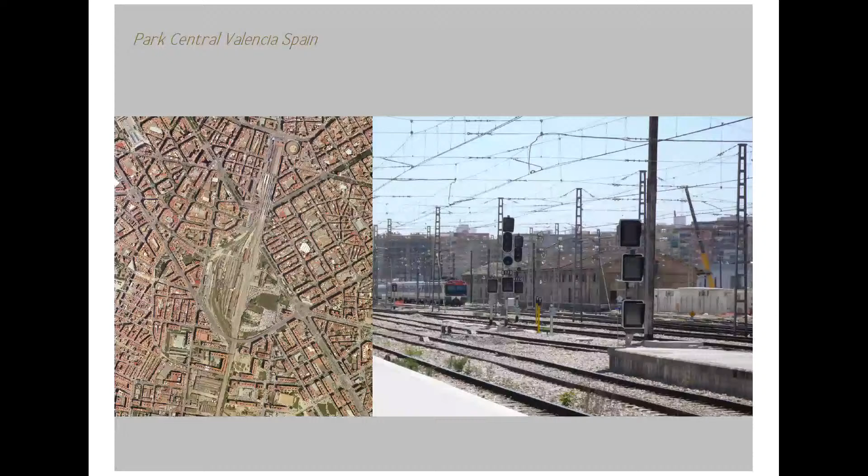Then you have this abundance of water that's coming down the River Turia, and then the Albufera, this huge aquifer of water. I think it's Adriaan Geuze that first said, Valencia, you've got water, you've got sun, you've got soil, what else you want? So it's really a very magical place to live and work.

The history of the channelization of water is a history I grew up with, and it's also very specific to you. There's also the fact that the bowls are... let me go back one. The Albufera absorbs that water and filters it through the sands, which is amazing. That feeds the aquifers. So you have this perpetual system.

Then, after seeing the magical night, the next day I went to the museum, and this is one of the bowls that I saw. It was clear that this whole place is about food, and it's about serving food and being about food.

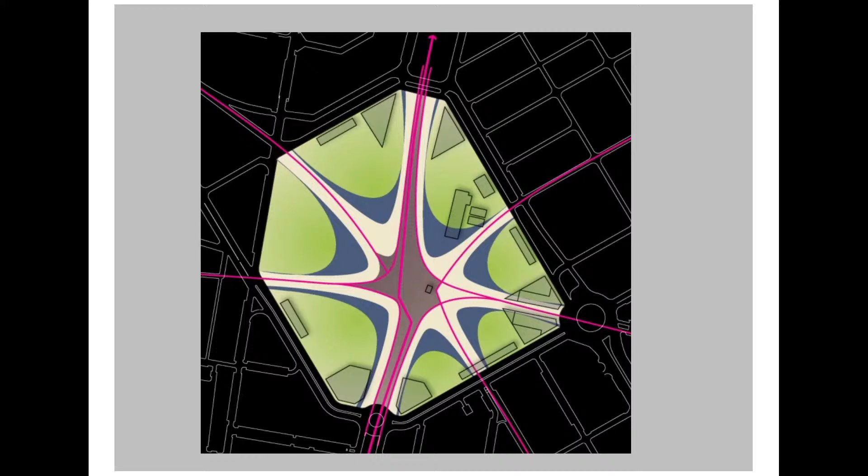So this is the first drawing, we worked a lot on the diagrams to explain the concept. This is facing north-south and shows how everything comes into the center. But as you move in, you see something else. You're constantly discovering, if I come here, all of a sudden I'll see this, or I'll see that. You're discovering things, then you radiate back out and radiate back in, and that's how the composition of the whole piece works.

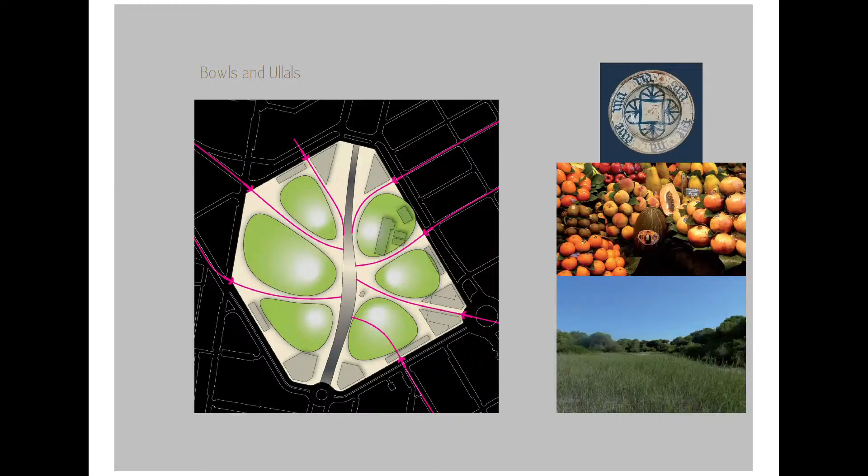Then the bowls come, programmatically. Here we see the ullals, the big sand dunes where all that water gets filtered, gets cleaned, and returned to the aquifer. So there's that thing about discovery. From the north, you can see this is a stormwater basin recycling all the water, sending it back into the system, but also having native plants, native vegetation. It is not treated water. Then as you come down, you discover this, or discover that, or discover this.

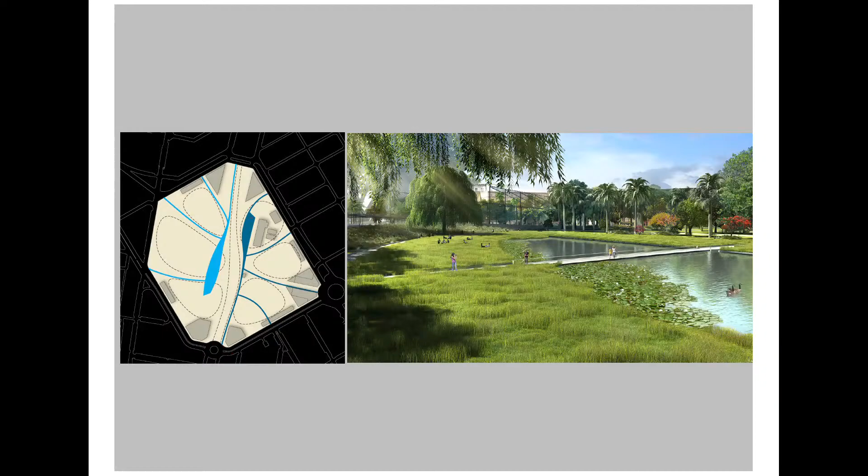Going up, this is all what I call cultural water, you play in it, you walk in it. That's what you see built today, the cultural water. On the side of the natural water, it's all native vegetation, existing around it, recreating habitat and biodiversity. One part of the park is much more natural and one's much more cultural. This cultural area here is existing, and this whole area you see today is much more cultural. This one is much more natural.

And so I really want to build it. Part of that is also having flexible spaces for events, having this big, beautiful historical building, having places to go outside, have events, have the fountains, turn them off, have fairs, making it economically viable. So a lot of those buildings are there to have investments done in them, to have fairs, to have activity. It's really expensive maintaining a park, so you have to generate ways of maintaining it.

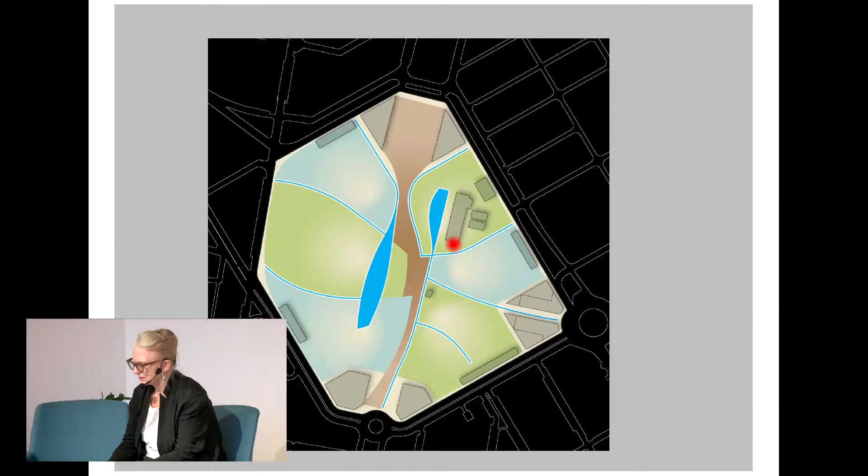This is basically the final plan, but what this talks about is that every time you walk into this park, you walk in with water. Every entrance today is with water, and every entrance in the future will be with water, because that is a symbol of Valencia itself. We still have the second half to build, help me build it, keep the pressure up.

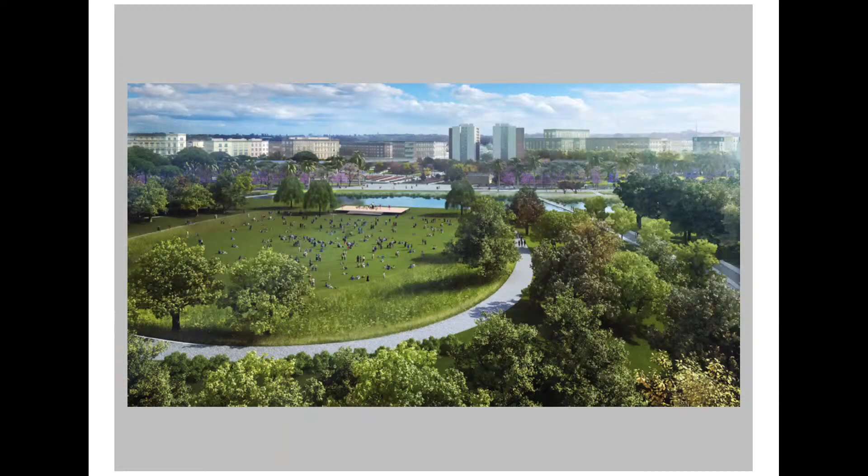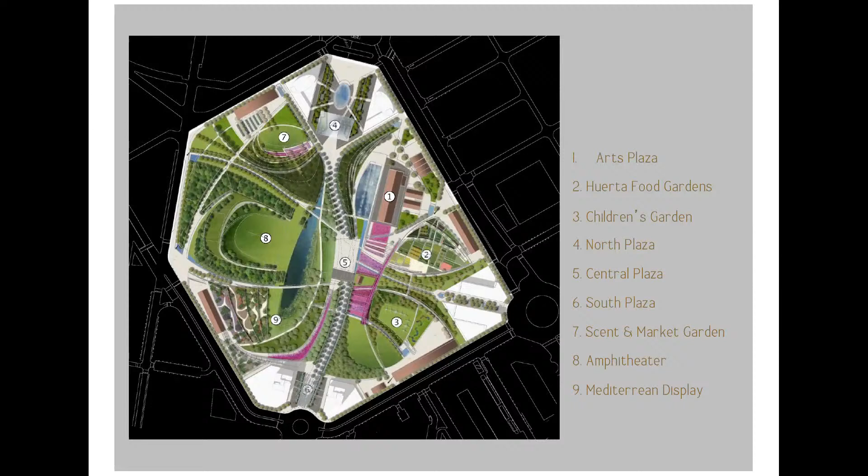And then this is the program that most of you know. This is historical, with the restoration of historical buildings, the Huerta, romantic valley between these two huge walls, the children's playground, everything in the Huerta, the floral that is grown here, and then the other sites we just spoke about earlier, big plaza up by the train station, another plaza here. There should be 1, 2, 3, 4, 5, 6 towers built. Those towers are part of development. They help pay for things. Hopefully they will come along and there'll be good architects that do them.

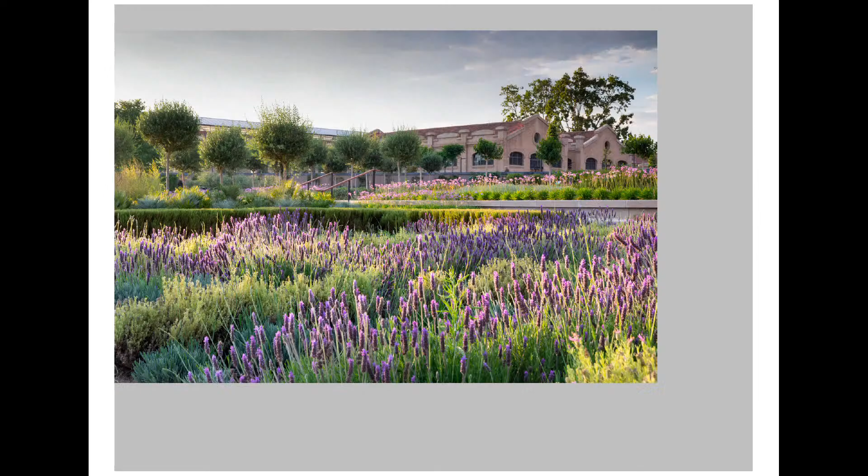So it's a garden right now that I love. It needs some extra little maintenance, but it looks pretty good for having gotten through COVID all by itself somehow, and with a lot of good help. And with time, I'm sure it will last over the time.

So last thing, water is magic. This water has a lot of different moods. You see it with jets a lot, but it's actually quite good when they're not jets and it's just silently moving over this space like this, and creating different patterns. So we need to work with how we program the jets and how we work with them. They can be raucous like Las Vegas, or they can be very quiet, and they can always be fun.

And always a good conversation.

Now, what's the other part we haven't built? This is one of the things I really hope we'll be able to build in Valencia. This was conceived over 10 years ago.

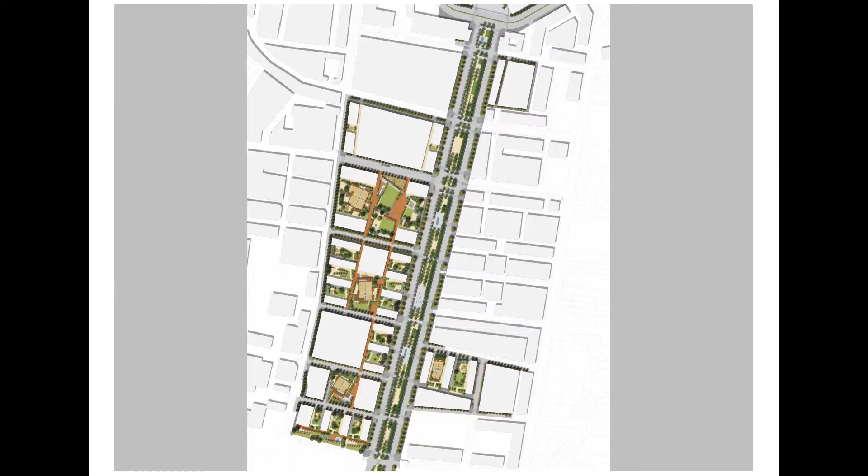And be careful, we can't just make everything green. We've got to get ambulances in, fire trucks in, garbage trucks in. I'm not sure we need your personal cars, but we have to have everything else that makes the city function. Having rapid transit, having all that, is really important to making a city work, and we simply can't live without it. So unless you're going to invent a massive amount of drones that put out every fire - maybe that'll happen in 25 years - but right now we have to deal with the services we have and the people who do them. I know that's a little boring, but it's true.

This was done 10 years ago. One of the things I love about Valencia is these huge boulevards of center spaces. Would like to use them more culturally, make them more attractive, find ways that they get inhabited and used more. Again, this section is 10 years old. Would like to take out more of this traffic, build in more green, make them more sustainable. Here's some of those spaces that can change program-wise, but again, you stay within here, and you do not have contact with vehicles on the outside, and thus danger.

And same thing here, they're all based on the same system. Hopefully I'll be back one day and finish the rest of the project to create the neighborhood to the south. And somebody said, well, who's doing the buildings? These are a lot of buildings here that have to be built.

And they said, oh, the same architect? And I said, absolutely not. You want a different architect for every building. You want diversity, something that is different talents coming together to make your city. Your city does not have the same architect doing the same building every place, anywhere. So that is something you as architects need to fight for - that you keep that diversity and it doesn't become this massive super block of the same architecture that looks like the same thing, where everybody looks at their building and doesn't know where in the hell they live or where their identity is. So I'm counting on you to fight that fight.

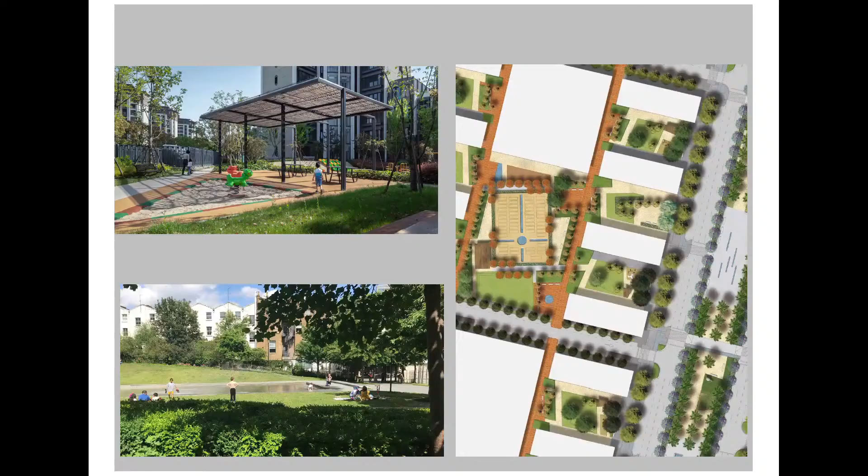Also, the center alley, water again—water everywhere is part of your culture—and making sure we get really great planting in there, biodiversity, also just flowers, things that are just part of our lives that make us happy.

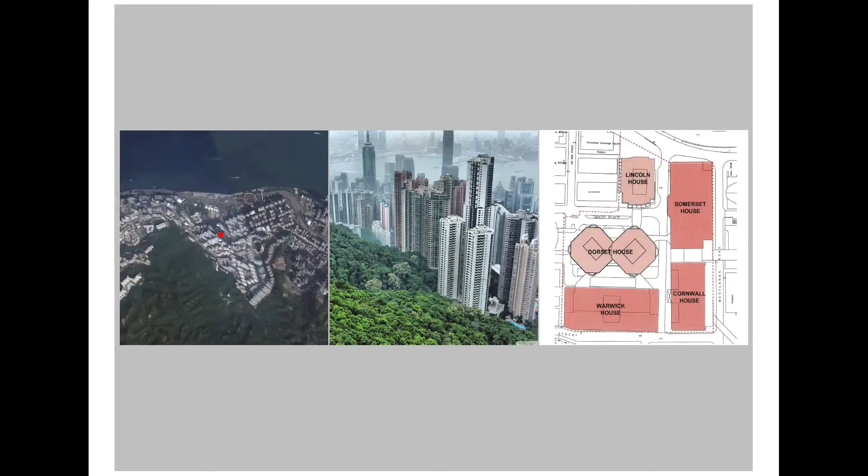So this is Hong Kong, and it's the first time I'd worked in Hong Kong, and wow, what a trip. I'm working on the Rock with a company called Swire, and they own a little bit of land—like all of it. This is their territory, and these are just a few of their buildings. Everything's high rise, but the fabulous thing is the Rock is all natural vegetation, and it's all protected. So you can stay in a hotel, walk out, and within 5 minutes you're hiking in a forest in Hong Kong. It's one of the healthiest cities I've ever lived in, and I've spent 10 years there now and absolutely adore it.

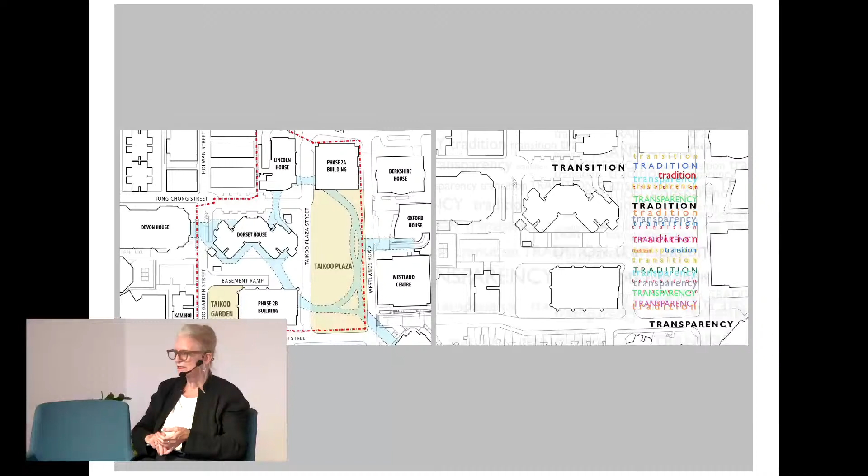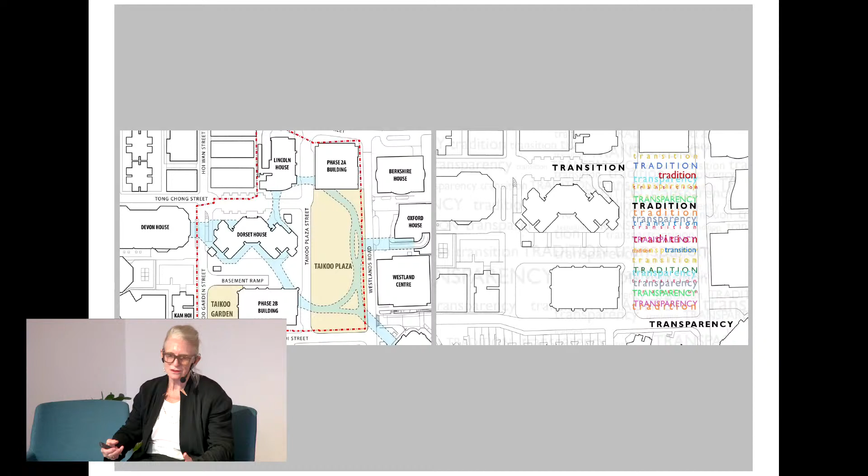At the time I started, remember all the different manifestations were happening there, where people were saying, well, the Chinese are coming, they're going to transition us, and other people are saying they're going to take away our tradition. But then, what is tradition and what is transition? A lot of people said there's no transparency. So this is about that period of saying you're going to transition, okay—there's no way around it. But can you keep some tradition, and can you also keep transparency as you did it?

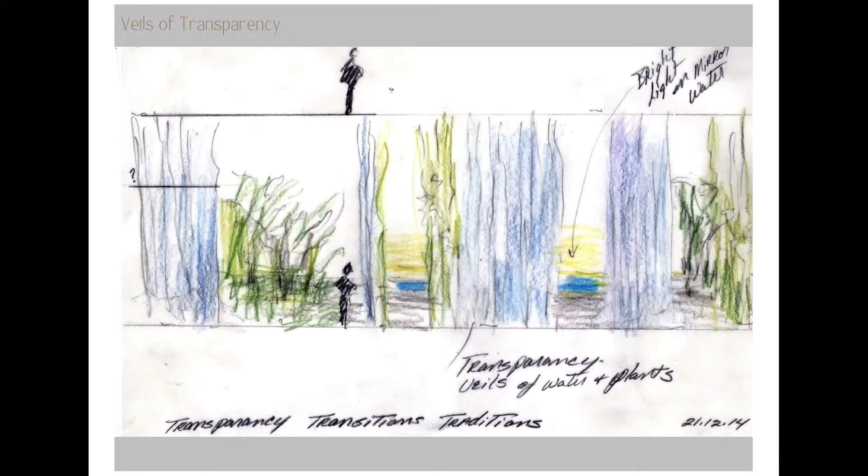So how does that part of the culture, how do you integrate it into your concept? I don't want to take up too much time, but basically—rain, and rain, and rain, and rain, and typhoons, and wind, and rain. So we wanted to do a piece where we look through a sheet of rain, basically, into a new future.

So that's your transparency, a veil of water, and through it there is a bright light that you see through, and that's your future. There's this walkway up above where you can see into the piece and still be separate from it, but also part of the piece.

And you'll see the site—it's the size of a football field. In Hong Kong, that's unheard of for a landscape. You know, build a football field of landscape. The way the site is made, one corner is 5 meters higher than the other 3 corners, so it has this tilted piece, which is this here. And then it has this walkway, done by Hugh Dutton, that goes all the way around it. So this becomes a podium of that transparency that you move through into this landscape.

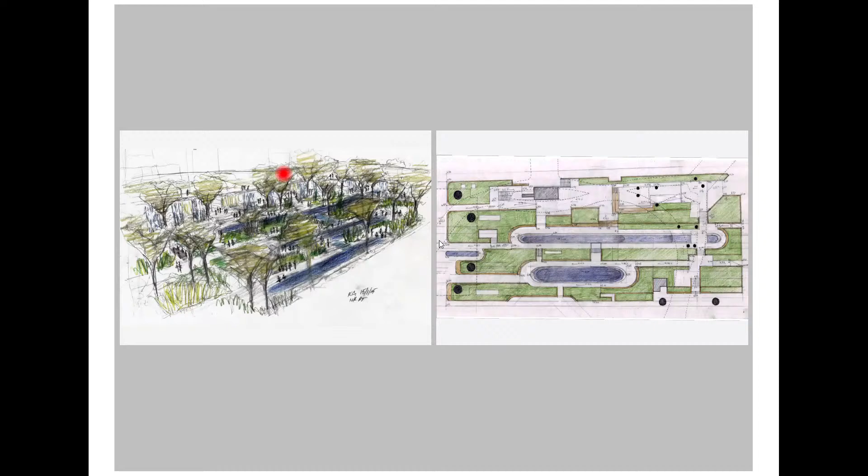This is one of my first sketches of it, having these lines of water you move through. If you look at this drawing, it's based on what my client did for a living, which is shipping sugar—that's what paid for all this. You can see where the boats were coming in, and this is my model of the piece of the landscape.

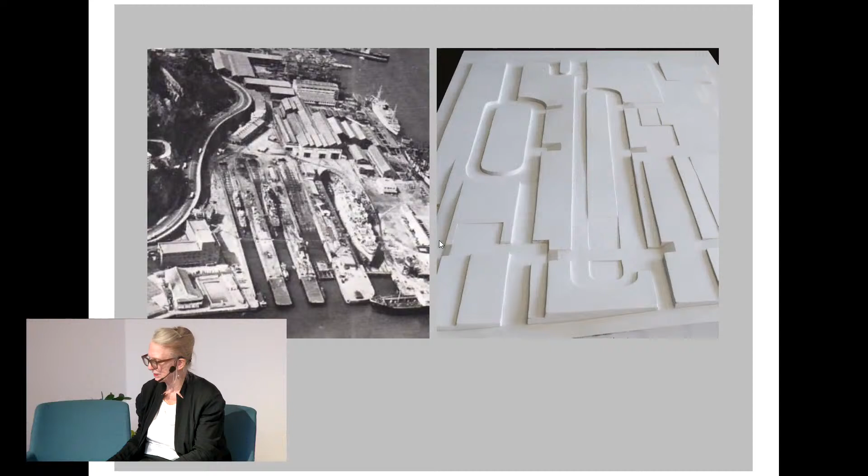Now these are water features. This one's 76 meters long—this is the oval water feature. There's another one down here. But they're all lines and veils, so every time you move through one, you're moving through a veil, through transparency. And the one place the sun hits every day, all season, is right here—so that's your bright light right in the middle.

So these are some of the sections. Everything's built on a 5-story garage underneath it. What they did is they took down 3 buildings and put up 2 sky rises on either end to pay for it, and liberated all the ground around it.

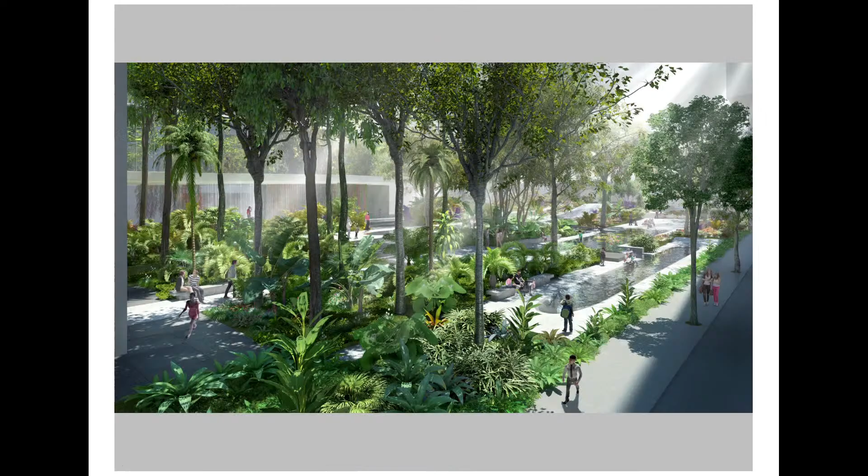So here's the model, just to show you the high point I was talking about—it's up at this corner, and you can see how it steps down. One high rise is here, the other high rise is here. We actually did the interiors of that high rise, because in my office my partner, Neil Porter, is an architect also. These are some of the drawings—we're subtropical in climate type. And then we started working on how the water works.

This is something a lot of you probably already know. We do a lot of stone carving and a lot of working with water. This is the long pool, and it has water moving down it. Then we started modeling it to see how you're going to actually do it.

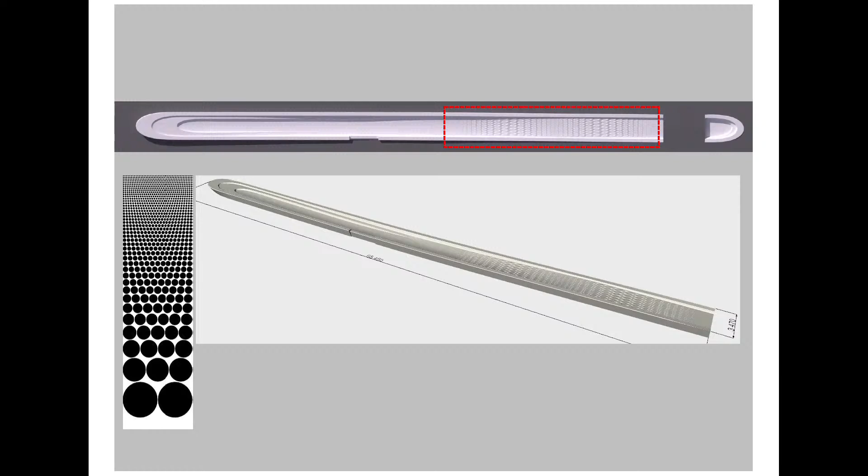I think it's good for an architecture school to see that we don't just pop up with these things. They take months and months to do in the computers, in models, testing them. I wanted to show the process quickly: you can see how we go from models here, then they're cut in polystyrofoam, and then tested for how water movement is done.

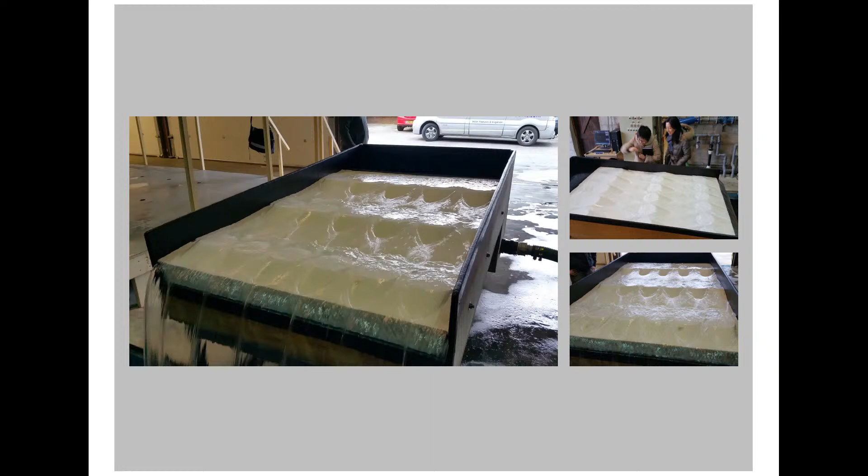It's one of the cheapest ways to test them, using polystyrofoam. We started experimenting with that about 7 years ago. It really helps, and the polystyrofoam works just like stone. The CNC machines can cut them in about 3 hours, not 5 days or something. Then you move to stone, and it's the magic of the stone—the water through it changes things.

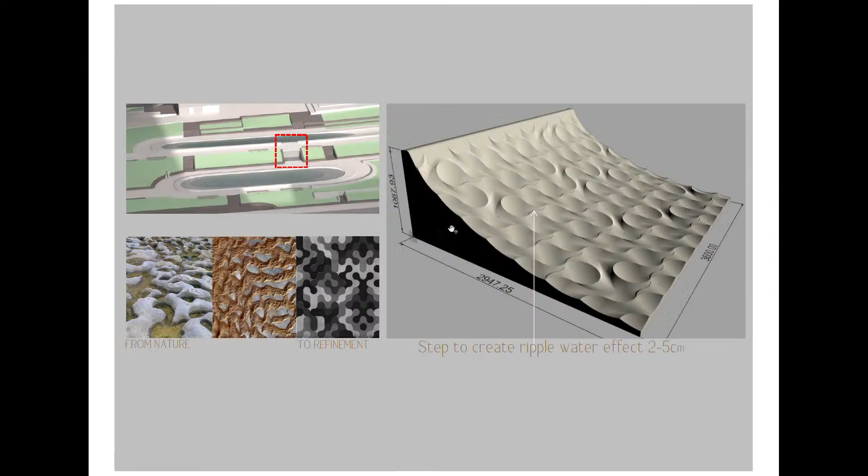This is another waterfall, another area between two basins. This basin flows into this one here, and this one flows into the recycle of the whole system.

These are some of the patterns, looking at how you catch water and move water, and again testing it—everything is tested. Do not try to carve a piece and not test it for water, because it probably might not work. I've seen too many not work.

Then trying to figure out what is the best stone, what is the best texture—people decide to walk on it, so they don't slip. There's a lot of different things you have to be careful of if you're doing water and stone. These are some of the CGIs. I have new images, but I'll actually be there to take final images in 3 weeks.

The other thing we did, they're feng shui forests—pieces of forest by villages that the villagers take care of to protect their village. We couldn't find the trees anymore, so we went to a local university with a seed program, where they do experimentation with horticulture and seeds. They actually gave us the seeds, and we started a nursery and grew our own trees.

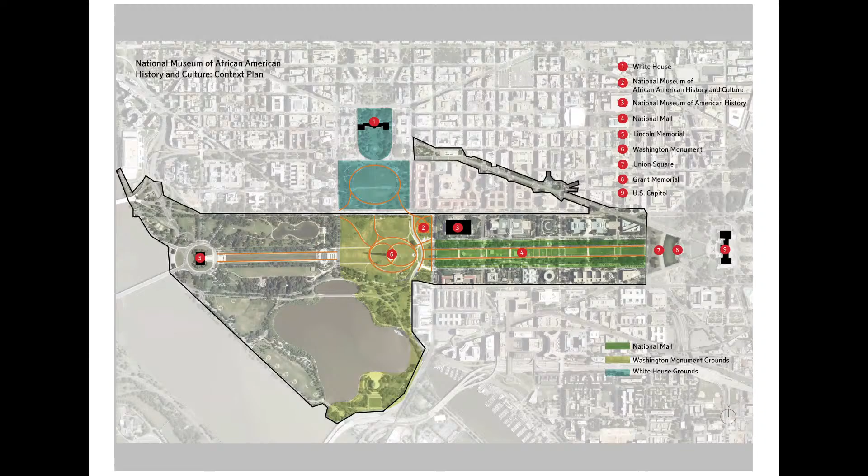We had to make sure we wouldn't flood the basements of this museum. And also you have eyes on you in Washington, D.C. because you have all this historical landscape. So we worked really hard to fit in with the Washington Monument, the Oval Gardens of the White House, and the mall. One of the things that happens here is at the Washington Monument, all the traffic dips down, so you never see a bus go in front of it. We worked with that land movement to understand how the mall continues, and how we integrate ourselves in. You've got a big grade change from here to Constitution.

Most of these museums have a whole floor inside of them, so you have one entry at Constitution and another at the mall. How do you do that with a contemporary building that wanted one floor as the entry from one end to the other? Working with the architects and the site, over time we found a very simple landscape that would support all the different parts of it.

And obviously we're in Washington, D.C. We have anti-terrorist walls everywhere. They have to go like 2 meters into the ground, with a certain thickness and so much steel in them. And then you want to make them disappear, right? Like they didn't exist. That's kind of an interesting challenge, but we did it.

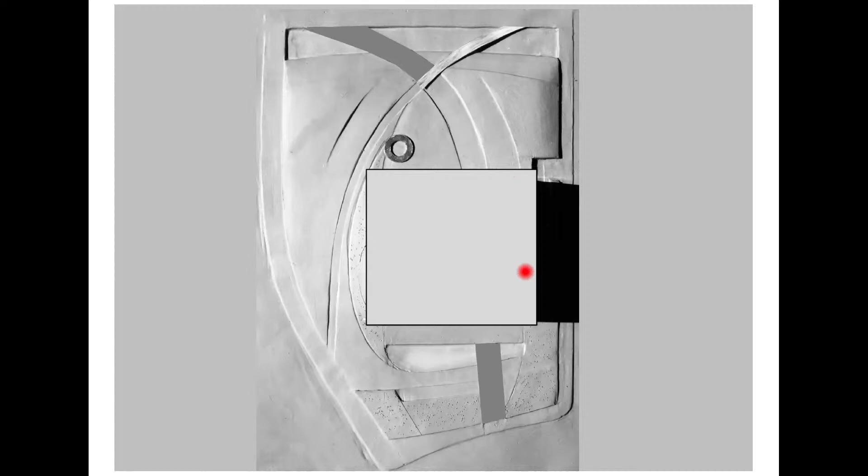We flood up to here. This is my truck access, underground deliveries here, and we're above the flood line. Siting a building is always an interesting endeavor. This shows how we worked with the people movement that flows through the site without going to the museum, but still being part of the Washington Monument and the mall, to make sure we're integrated into that entire site.

So this is my model next to a very simple plan showing the different elements I just told you about. This is the water feature on the north, and the sun—excuse me, it's on the south. You can see the sun in the winter is here to keep you warm, and in the summer here. David wanted this very large balcony piece, which actually protected our entry from the southern sun. It gets hot in DC—it gets really hot. And I had my water feature here that you cross over.

You can see this water feature there. Again, we're up here taking part of that grade going down to Constitution, pulling people in while still creating the security walls on the outside edge so you don't see them. It's a real balance of visualizing where people are and what they see, so they don't feel like they're in some sort of fortress.

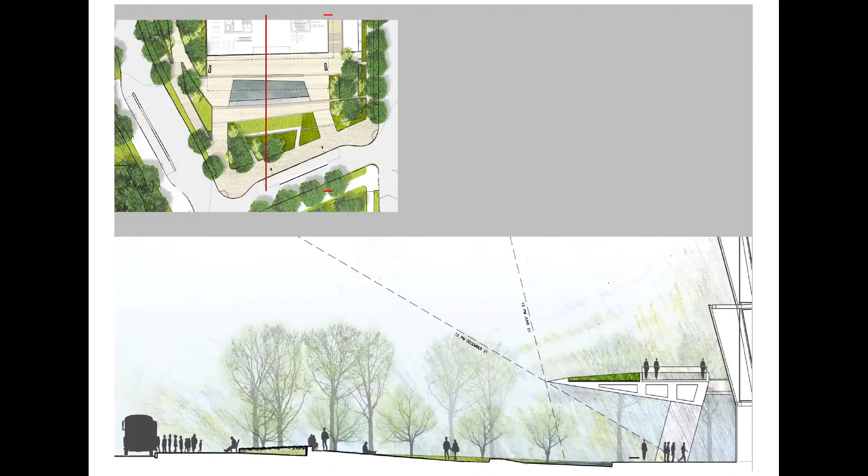This is my concept for the water, and it's about African Americans. There's so much turbulence in their lives—if you're an American, you know there's a problem. But on the other side, the African American community is one of the strongest communities I know, and they're fabulous. You look at Max Bond, you look at some of the really wonderful people. So I have a water feature full of turbulence and full of drop-dead calm. Just: I'm strong, I'm Black, okay? I'm not moving. Those two things are what is America.

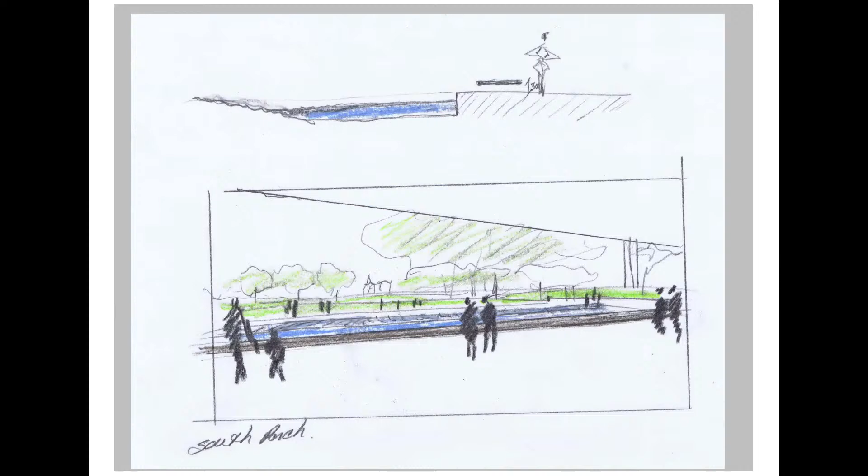Trying to represent that, I created this piece where the two waters never touch—one is turbulent, one is flat, and they never touch. There's a slice between the two of them, and there's a long bench in front where you can sit. In the turbulent area, I worked on this thing called murmurations—like flocks of birds, the way they move together. Have you ever watched how they are? Their wings are almost touching all the time.

And it's one of the most amazing things how they move. The African American community is like that. They are always in touch. They may move and do things, but the support system within it is really interesting. And so the songs and the music and this joyness of them is something that I wanted represented in the turbulence. So this is my murmurations, and each one of those are turbulence in the water.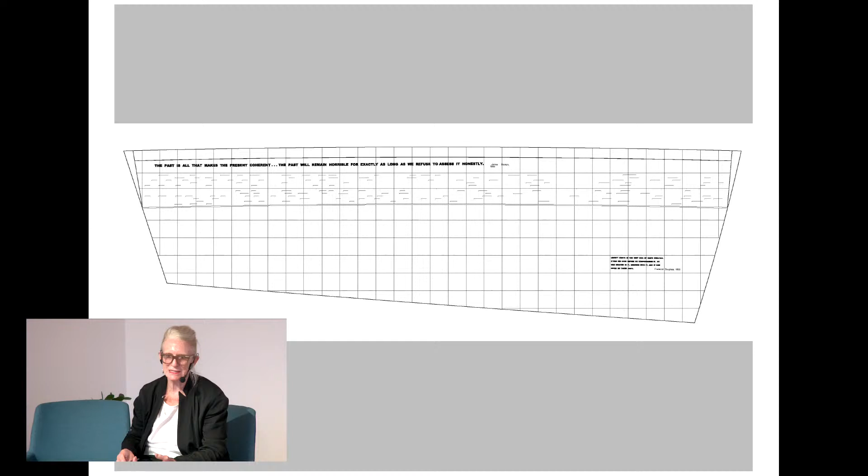And then there are some great African-American writers. So there's written statements in bronze under the turbulence because they wrote about the turbulence. And so this is the drawing. And then this is what it looks like, just that one slice between the two. It looks simple, but to get it that far, to have that much meaning, I think is really important for me.

And this is what it's like today. Everything's handicap accessible, of course. And it also reflects the Washington Monument in it. You are sitting there in front of the African American museum with the Washington Monument, kind of symbolic. Very, very strong place for people, and a place where people can sit and be at ease.

And that is one last thing that happened. I had what we call value engineering because David's facade went over price. And because his facade went over price and it was such a beautiful building, they said, okay Kathryn, cut out a water feature. So remember that water feature down there? They said, get rid of it. I said, okay, that water feature was my security bollard, because that meant that a terrorist truck would go into it, it was deeper down in it, and it would block them.

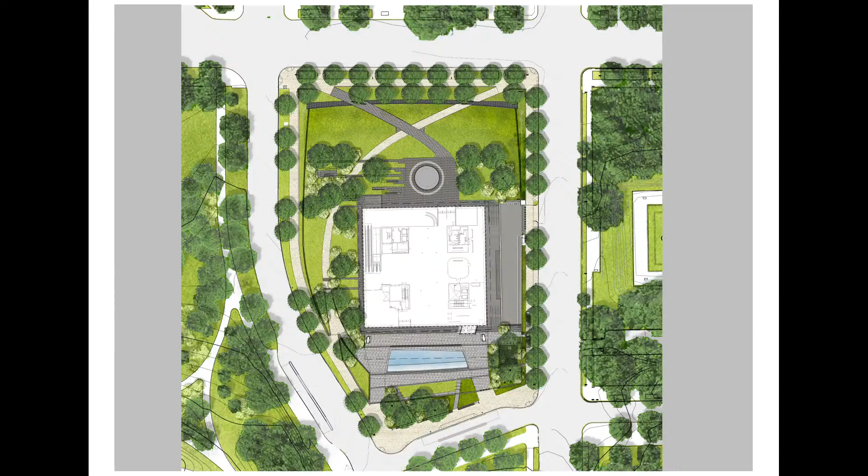I said, okay, well, you don't want it, I'll just put up a wall there and put your museum name on it. The Arts Council came back and said, no, concept not good enough, go back to the drawing board. And I called David and I said, I want to do this really big black wall. He said, you got all the power. The Arts Council refused it, they got to have something. So I proposed my black wall.

And the black wall is a huge muscular wall. And it doesn't pretend to be anything else but an immense black wall. And it is solid granite, 5 meters wide, 200 meters long. And it's crafted completely beautiful. It's like a beautiful shoulder. It's rounded, it's warm, it's absolutely fantastically beautiful.

What happened, I could have never guessed. These are where the handicap access is, so you can get through. It's become the party place of Washington, D.C., because your back's to the sun, you're sitting on warm granite, and all the food trucks are parked in front. And it's just, everybody uses it all the time. I would have never guessed it.

But if you think about it, it does make sense. Look at it, it's always like this. And in winter? Huh, in winter? Yeah, because it's warm, because you've got the sun, the black stone. It's black, you know, it's African American history building.

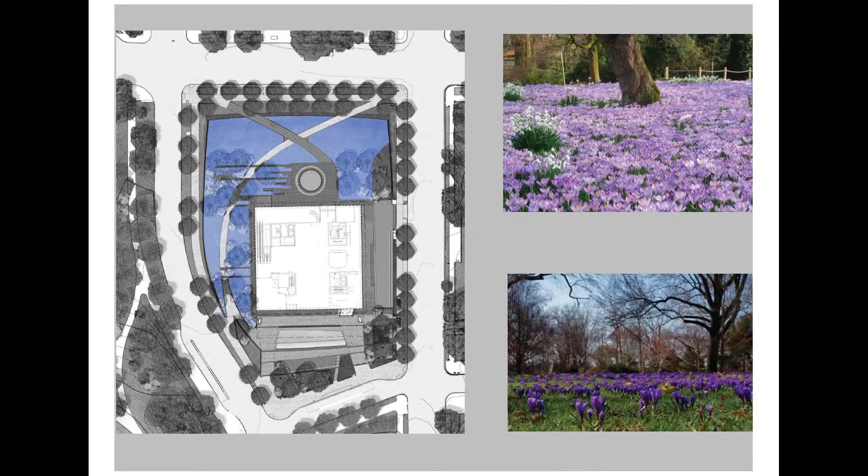It's black. And there's then the fact that we've discovered all sorts of things, like blue is the color of the dwellings that protected the thresholds. So we planted for African American month in February, 360,000 blue crocuses that flower only that month. So it's full of surprises, but God, it's a beautiful site.

And David did a beautiful job on the building. No, it's absolutely gorgeous, it's very sober. Everything's very sober, it's very simple. I think the New York Times critic said of my work it's the most understated I've ever seen. For me, that's a success.

I'm not sure how much more time I have. Do I still have time? Yeah, okay, yeah. I probably put too much in, but this is art.

For you guys, okay, we're all drawing on flat, and then we're drawing something that goes up, or I'm drawing something up that goes flat. And so the perception of space and the perception of what we draw and how you teach it is really important. And so I use art to teach people about landscape, to say, how do you look at what you're drawing, what's your composition? So if you take a Kandinsky, okay, put it on the table, put your head on the table, what does it do? It all of a sudden becomes mountains and lakes. That is simply the same drawing on the table.

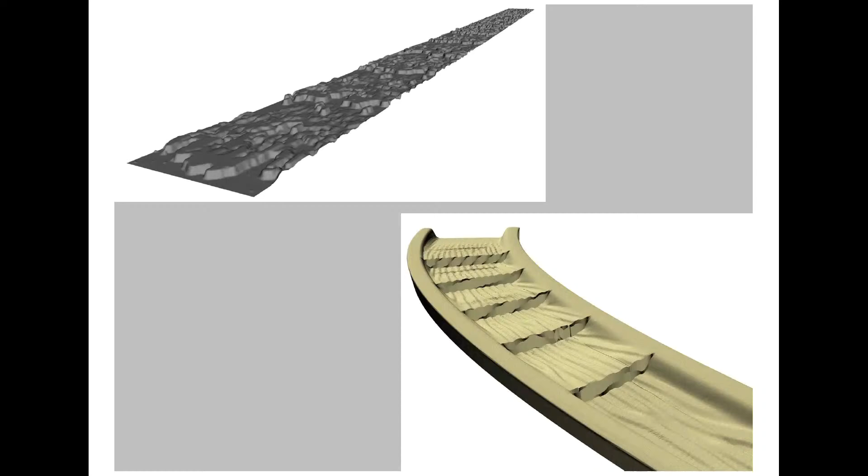I was convinced because I'd seen the guys work on Sagrada Família in Barcelona doing the restoration of that end piece. They had modeled that entire end piece in 3D, and then they were using different small machines to start cutting it.

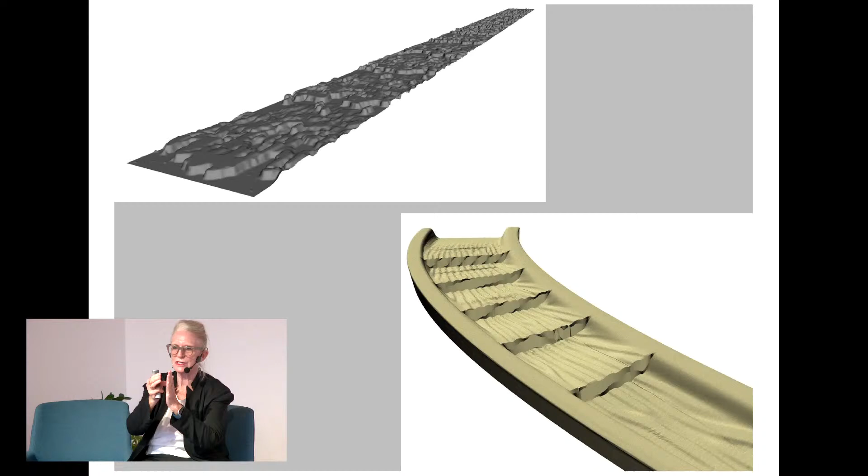So I knew there was a way to do it, but we just had to blow it up in scale. So we plunged in, and this is the first cutting.

When we first started, this machine would break a head pretty often. Now we've learned more about how to change heads, how to use one head to do one thing and then use it again. There are new machines that actually go in and pull a head out of a drawer and change its own head.

So you can do another part of the job. The machines have really changed today.

But at this time, when we had a head broken, the Germans were taking something like four weeks to replace a head, and Seoul was taking 48 hours to replace a head.

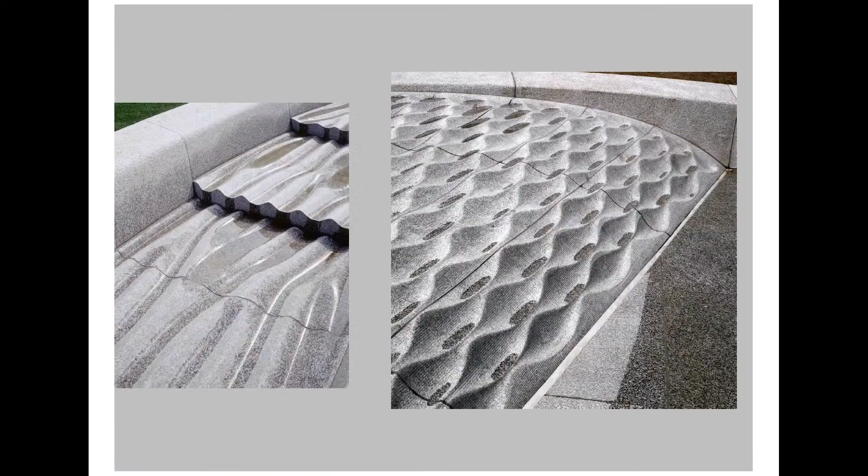So Seoul made all our heads. And this is what we were able to carve with them.

There's a lot of stories about Diana, about her adventures, her love of fabric, her movement, her excitement about things, champagne in her life.

This is air that's blown through by Venturi force. It's 85 meters long. All the water is oxygenated. It goes into the lakes to eliminate algae bloom in Hyde Park.

So it's part of the whole environmental cycle of the water itself. It's not treated; it's used really for oxygenating lakes. But kids love it. This is called rock and roll—she had a little rock and roll in her life, to say the least.

I'll go here to the Art Gallery of New South Wales, working with SANAA. SANAA did this beautiful new extension, and this is their plaza. I did the master plan here, helped them with it. I've known the director for a while, and said to him, this is the old historical museum.

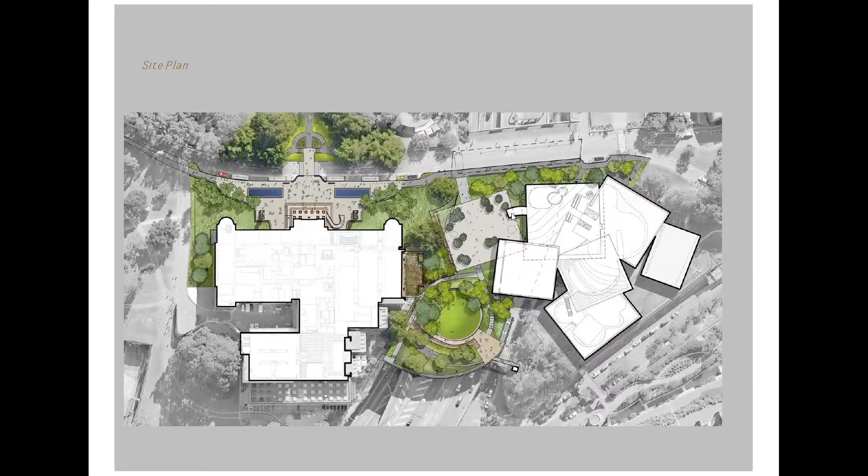I said, Michael, you can't have a new pretty sister and have the old sister look dilapidated—you've got to do something to your facade. And so he said, okay, what? And I said, well, why don't we take away the cars?

Let me see if I can find it—I guess this used to be a parking lot, all of this in here. All of this was a parking lot. This is the historical staircase.

There used to be no way to get here for universal access, there were steps. So we created a large plaza with two pools of water. And one of the things about water in Australia—this is this beautiful portico facade. It's so noble, it's so beautiful, but it just was dilapidated, all the front of it, not the building itself.

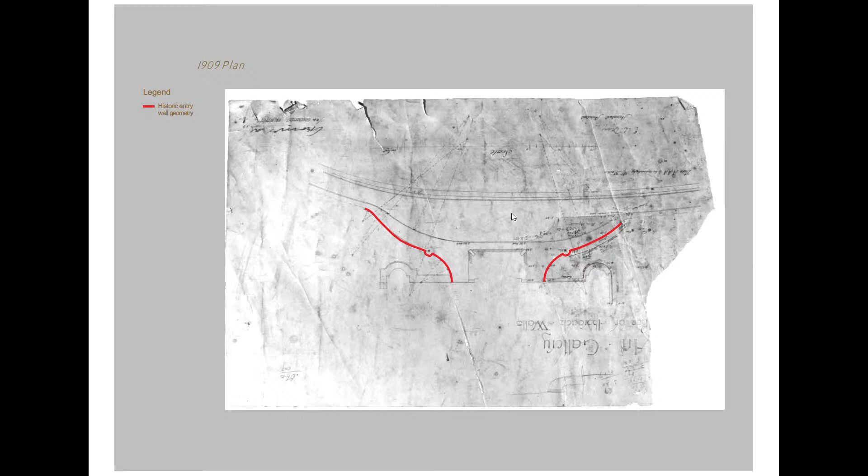This is what it looked like originally, and these are the curves of those walls. If I go back, you can see how people used to sit on these walls—you see this curve? You can see how it used to be here, and you can see the historic line where it was before.

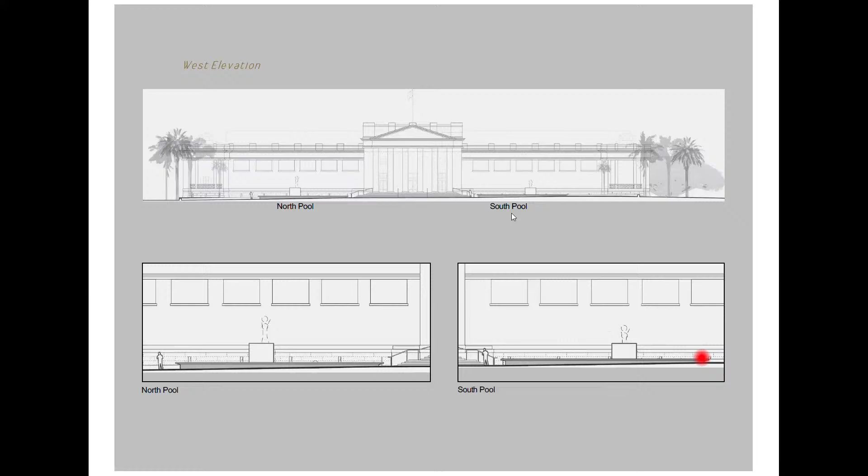So we did a lot of historical research, and I said, okay, let's put these two reflecting pools to reflect the facade in a very neoclassic, streamline move, black. The land moves down, and water's flat—it's got to be horizontal. So this side is only 40 centimeters and this side 70, then 40, then 70 again. So you have a relationship to the object that's constantly changing across the site.

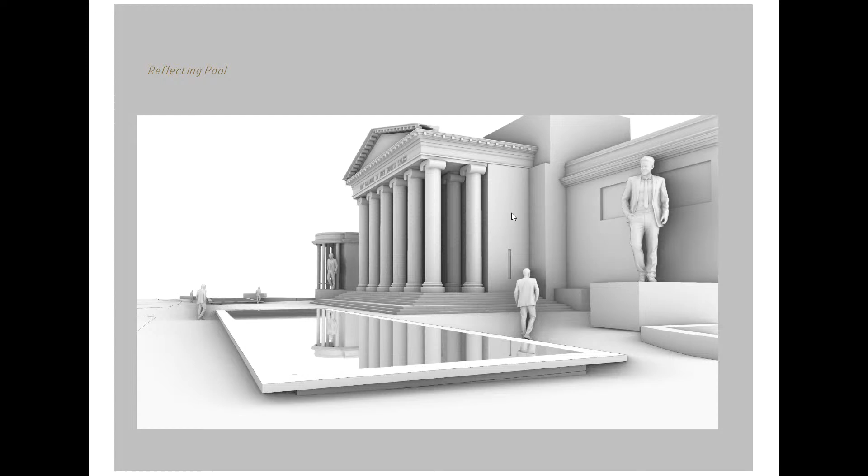And here is the first model of it, of how it reflects the porticoes in it. It's very sober, very nice. Then this is a CGI.

One of the things about Australia—it has droughts. When you have drought, you can't have a bunch of water because it's just not environmentally responsible. So they said to me, what's going to happen when we empty them out? And I said, well, we've got to turn them into a piece of sculpture because they have to look good empty. And they also can't have skateboarders on them.

So this is what they look like today—mirror, black granite, perfectly engineered, and really everybody loves it. Notice all the statues are black, the writing on the walls black—all those things to make this fit. This is my drawing of what to do when it's empty.

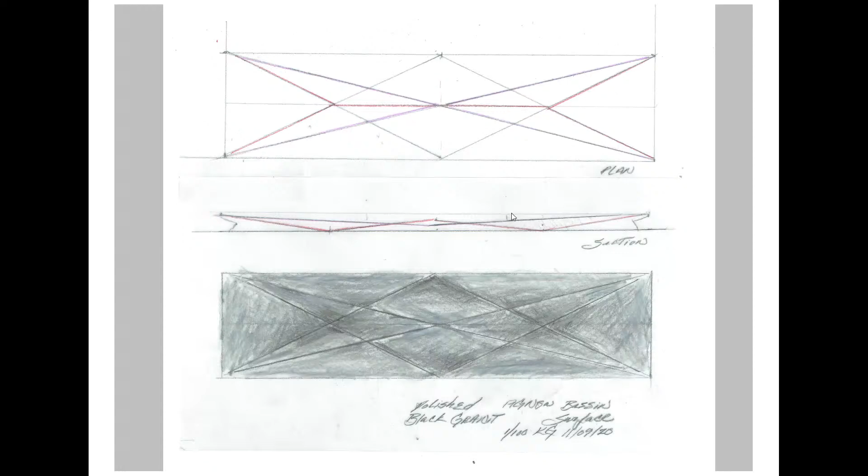It's basically triangulation, like an argyle. Argyles and triangulations are in primitive art and in British art—or British history, the argyle, whether it's up north, they're in both. And both of these people live in Australia, okay? So it seemed like the perfect marriage of the two to come together, but then form them like a sculpture so skateboarders can't skate on them.

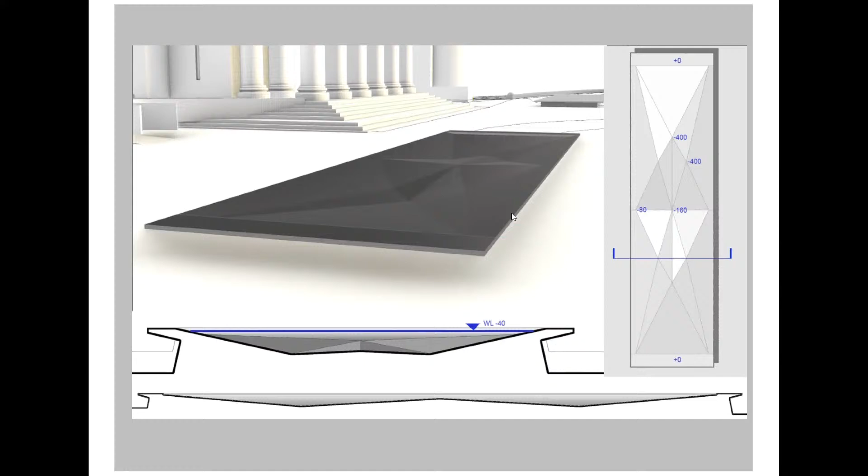This is showing how the water would run over and around them. And these are my sketches, and this is the 3D model of it. It's all solid black granite.

When I first got there, they were just finishing it, and I saw the guy and said, you got to clean that thing, it's got to be a perfect mirror. He came back later, and I said no, it's not clean enough—I mean, clean it, it was covered in construction site stuff. He did, and this is what it looks like when it's empty. It's like a kaleidoscope of mirror of the environment and of everything above it. It's absolutely fantastic—it's an art piece, but it's a surprise, and it's an entry piece, and it changes with the season. But you have to clean it.

I was so happy when I saw it. I wasn't sure how it would actually work.

I think I'm going to skip these two pieces, Morbras and Pen Mirabeau in Marseille. Just really quickly, stormwater management—we've been doing it since my first project in 1983. So people think they've invented stormwater management. No, we've been doing it a while.

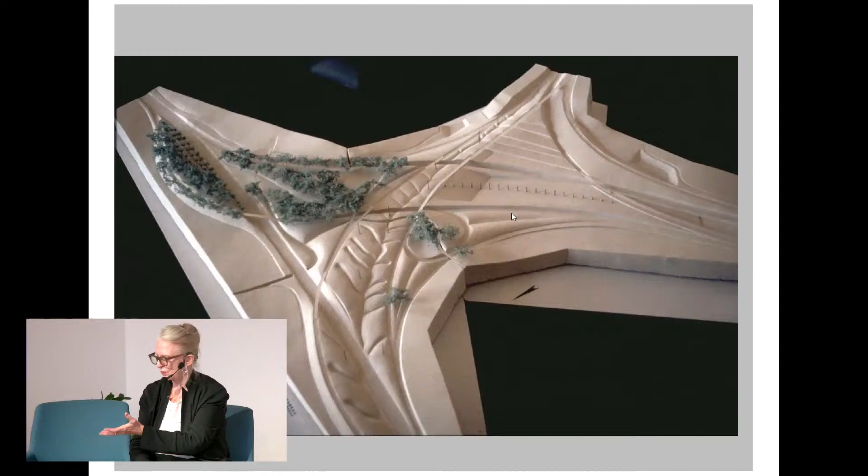Restoring damaged water systems where we collect water from freeways—this is 1993, big infrastructure jobs, I love working on them. This is the site the way it was, and then we did a model of how you collect the water, how you hold it, where you retain it and return it.

The one thing you need to know is this piece here is a big water retention, and another one here. These are columns of concrete where you can see the mark of water, how full it has been, so you understand how much impermeabilization that freeway has done. This is the site today—those walls are 12 meters tall, but that's what holds up that volume of water.

I really like doing this big stuff. Look at the truck—it's just a little truck, right? But those are the concrete basins. The top is horizontal, the bottom is not, so you can see where the water line is—that was the last stormwater event, how much water came into that basin. Can you see those lines? Here, yeah. And it's all native plants in there, in prairie.

Eiffel Tower, I'm not sure I should do the whole thing because it will probably take 15 minutes and it's 7:30. Do I do it anyway? Tired? No, not tired. Okay, so Eiffel Tower.

In 2019, we won the competition for 50 hectares in Paris. Just a little project, right? It was really hard. It's still hard, and we're still working on it. It's still going to be hard till I retire and disappear because it's taking so long.

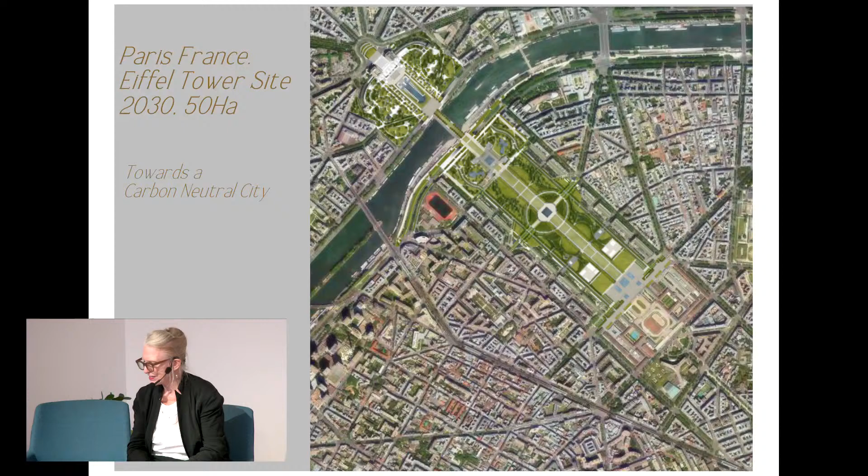But the thing is, Paris really wanted to work with climate change. They really wanted it to be a greener site. It's a historical site, okay? It's not something you can just jump in there and do whatever you want. You have the architects of France, the site, so many different people. You can't move an inch without having to convince half the world. So it was a huge challenge.

The biggest problem with this site is that it is all hard space. Look at all the asphalt, everywhere. And it's hot as hell. There are 10 million people a year, and those 10 million are compacting everything. All the trees' roots are dying. Things are just broken everywhere. Can you believe this? Palais Chaillot, and it has pink asphalt in front of it. You've got to be kidding.

It took us a year to win the competition, four submittals. That's what it looked like—completely cars everywhere, hot surfaces, ugly, people crowded on sidewalks.

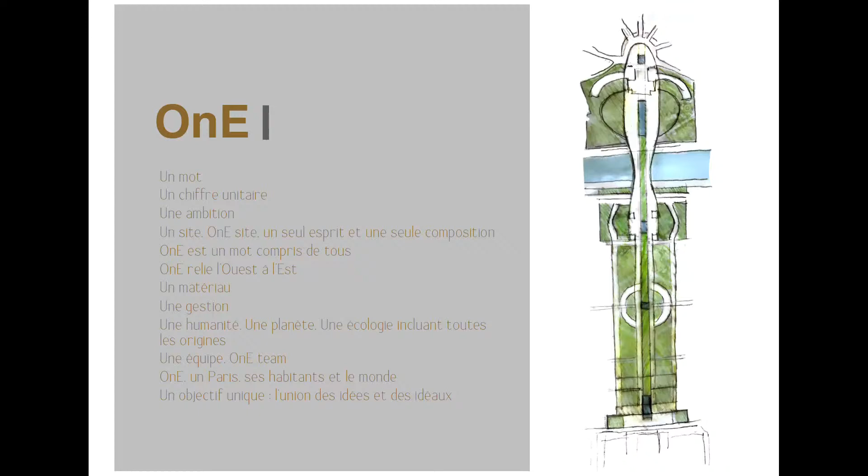The other thing that it did is I stopped the cars across the entire site. There are no cars from one end to the other—it's over 1.4 kilometers without a car. And so it won. That meant all the cars here on the quay had to go into tunnels that existed, and no cars the whole way. So your 10 million people can have kids, they can have everyone they want. There's no cars, there's police and public transportation. Not even taxis are allowed. So it's so much safer just by reducing down to that.

Then the other thing is really understanding why the Eiffel Tower suffers so much from all this trampling.

And the reason is the site is not dispersed. Everybody wants to come to the Eiffel Tower. So you need to disperse the offering, and you need to create things everywhere so people go everywhere, spread out, and don't just go to one place.

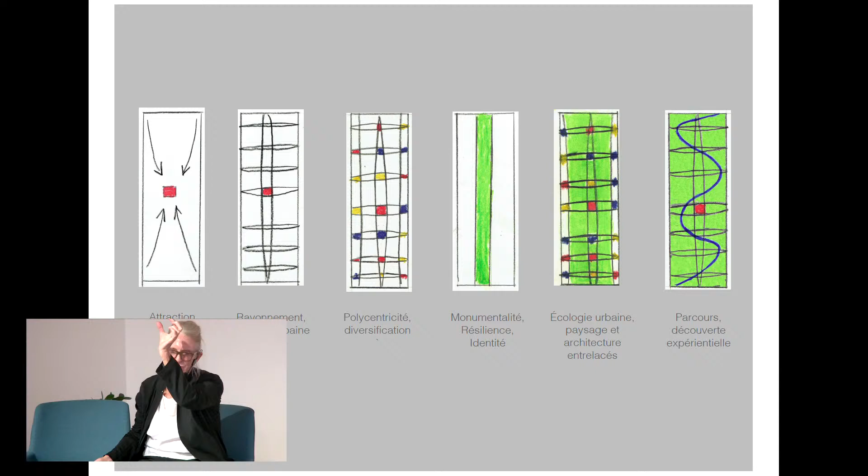And you still need to have that central green. You saw the length of the green—there's one green that goes from one end to the other. You have to have all that, and then meander with arcs.

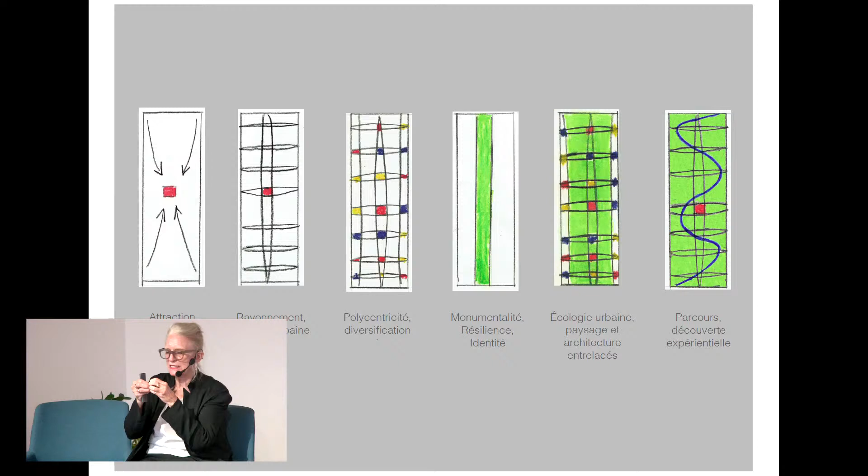So that's basically the diagram to decentralize everything from being only here. And that's where all the damage is also, because too many people go to the same place.

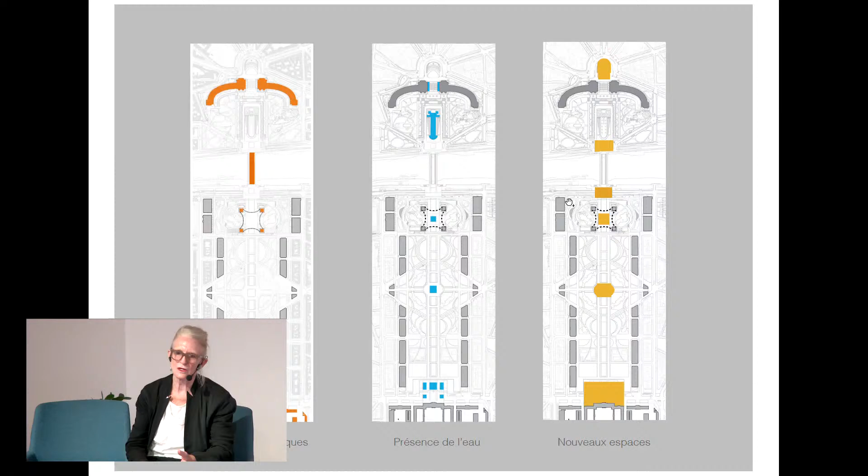We also have historical monuments: Palais Chaillot, the bridge, the Eiffel Tower, École Militaire. We're proposing one new water feature here, existing water feature, existing Eiffel Tower, existing water feature here. We're redoing new plazas here, here, here, here, here, and here. So you stop using the lawn for an event—you use hard space that's built to take it.

This is the only site in the world I know where both exist together, and you can see them. The center axis is here, and the picturesque is all the way around here—it's built that way. So it's absolutely unique as a landscape.

We worked really hard on restoring both the central axis by creating one lawn, 25 meters wide, the whole length. But it's raised 30 centimeters so people have a place to sit, and also so they don't walk across it—all those kinds of things to make it more sustainable.

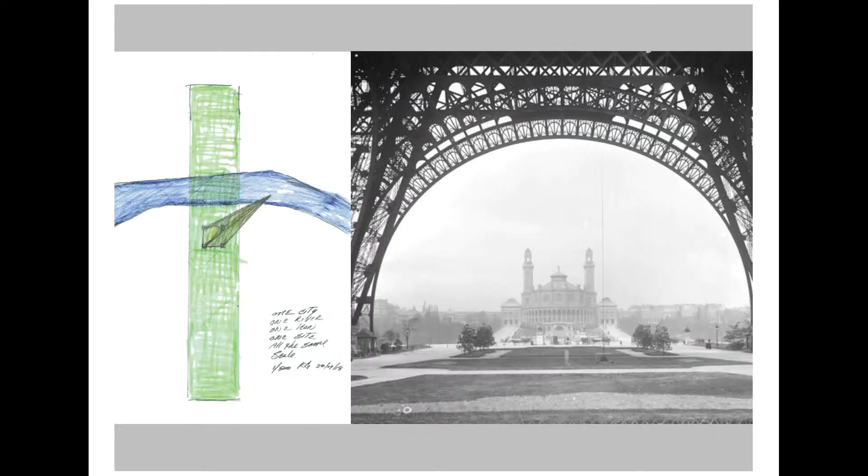And this is some of the drawings that show it used to be connected, what it used to look like. That used to be the bridge—it's now three times as wide. It was widened out during a Universal Exhibition. Going back to that one here.

It's really interesting—the Eiffel Tower used to have all four feet in landscape. And when you see it today, it doesn't. So this is the basic plan that won the competition.

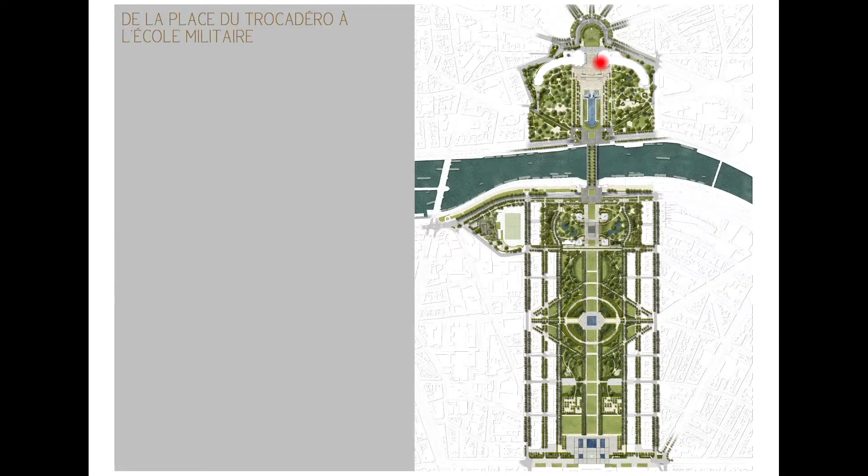So we start at the top at Trocadéro, and I'll go through this quickly. But here we close the circle and create an amphitheater here.

It used to be the traffic went around here. Last week it's closed—I was there. It started. We're going to build it, I hope, because it's really beautiful. And when you see it, I can show you a film, and the traffic works fine, and people can go there. Right now, there's one crossing to get to that center circle.

We will have five. And all of a sudden you've created a new green space in the center of one of the most dense cities in the world. Then trying to integrate all the different systems—transportation, historical, art—those different pieces. So here you see Trocadéro, the new piece, creating all of this here.

Then the next piece here is Varsovie. I proposed putting in these lines of stone here for people to sit. The historical monument committee said no—said okay, we'll do something else. We did something else that you'll see later.

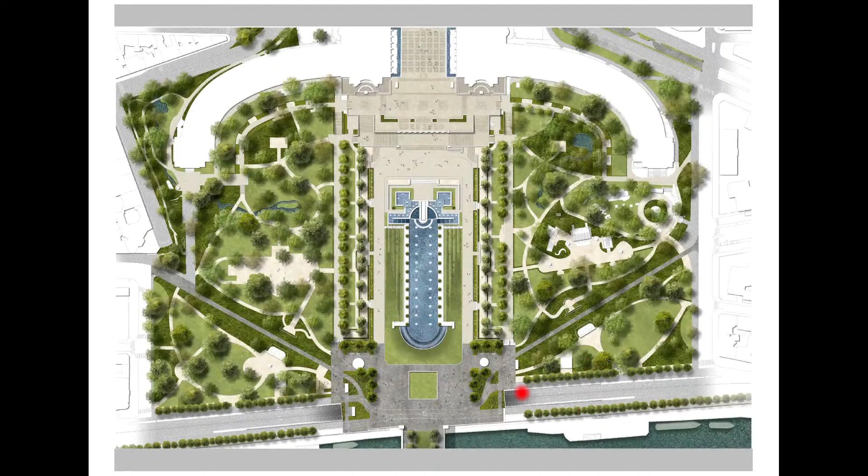And we restored all of this area here. We have not been able to do this plaza here—we're about to start to do it. The traffic right now is still going through this plaza, and we hope we get our approval to stop the traffic and go into the tunnel only.

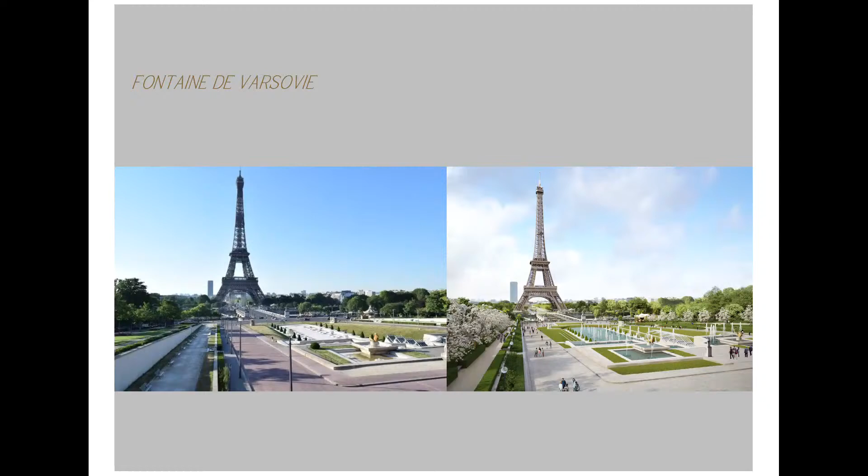And this is what it looks like. I don't know if you can see the difference, but on the left is the red asphalt, and on the right is brand new poured concrete, exposed aggregate, super fine, the same colors in limestone. It's absolutely beautiful—it's so huge, it's hard to see.

Then this is the project that isn't built yet, for changing that plaza from that ugliness to something more planted, more green. This is just a CGI of us putting in a whole new line of trees here to create more shade for this terrace.

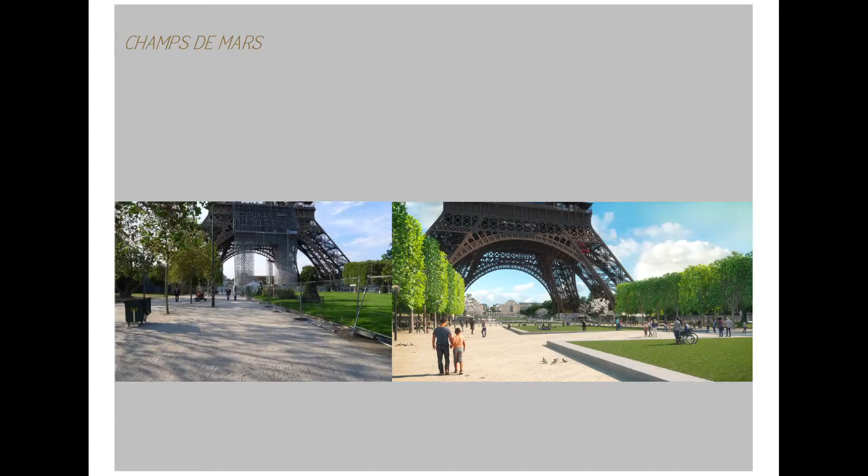This is the Champ, what I was talking about—raising everything 30 centimeters, lots of seating. This is creating new areas, walkways, a new plaza at the end in front of École Militaire. So you draw people to the very end, a big plaza with water features, really pulling people to use all of the site. I don't know if that'll ever happen.

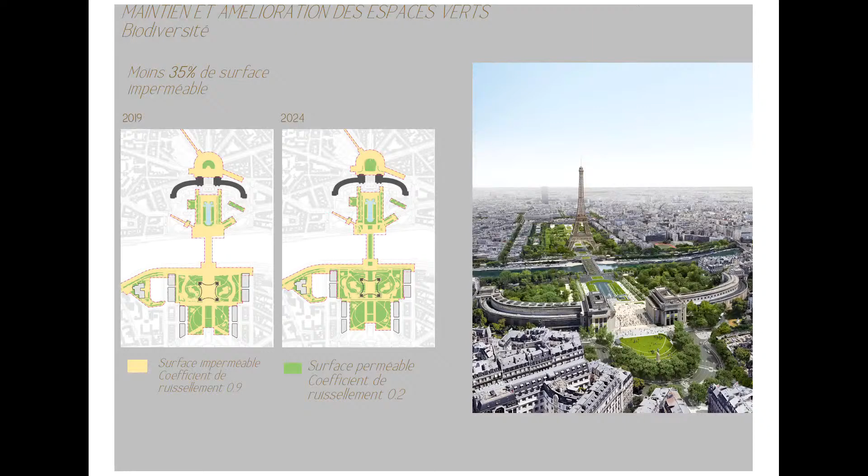We have reduced the impermeability by 35%, and we didn't change it historically. We made some of the alleys a little bit narrower, but we had experts in movement who said you've got to keep it at this width or wider, don't go underneath it. So anytime we could gain green space, we did it. All the systems take all the water now, it goes into the planting, gets recycled and collected. It's a really beautiful project.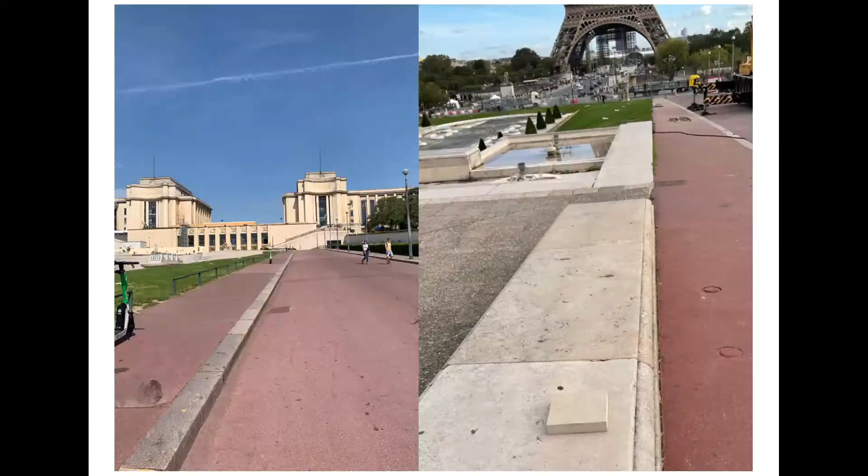Today, that's what it looks like for the first phase. It looked like that before, and it looked like that before. And it looks like that today. So I lost all those seatings, but I kept one line of stone, which is this one. This used to be a sidewalk where people can sit the length of this and not on the lawn. So you win little things that are kind of big things.

So I really like it. It's very clean, very modest, very simple. All around the statues so people can access them, take their selfies in front of them and all that. New line of trees, new planting, and you can see all of this is new stabilized sand. This is the new concrete area. I was telling him his tree wasn't aligned with the one behind it on that one.

And then we redid all the lighting. We took the historical light, changed all the guts out of it for LED, but also everything at 10 o'clock goes only light down, no light up. I think that's my last slide. Yep, so that's it.

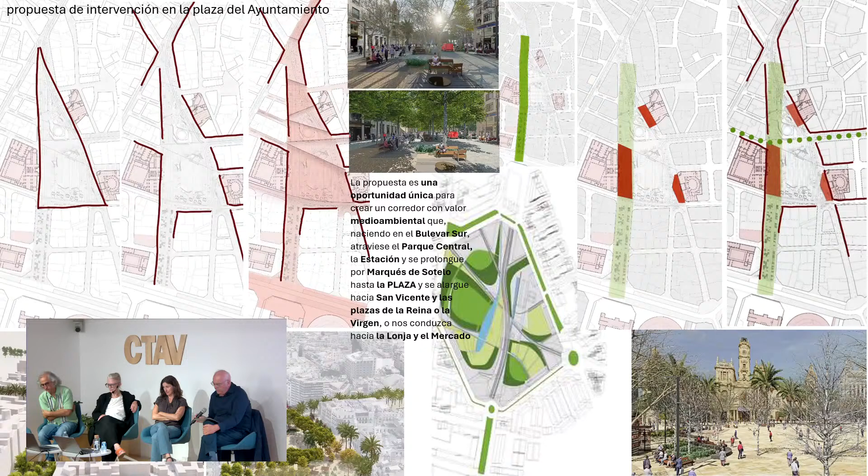¿Qué nos brinda la naturaleza? Nos brinda, para nosotros, un clima y una luz: la luz mediterránea y el clima de nuestra ciudad. Y una manera de usar la plaza muy propia de nuestra cultura y de esa alegría de vivir. Podemos entenderlo como parte mediterránea.

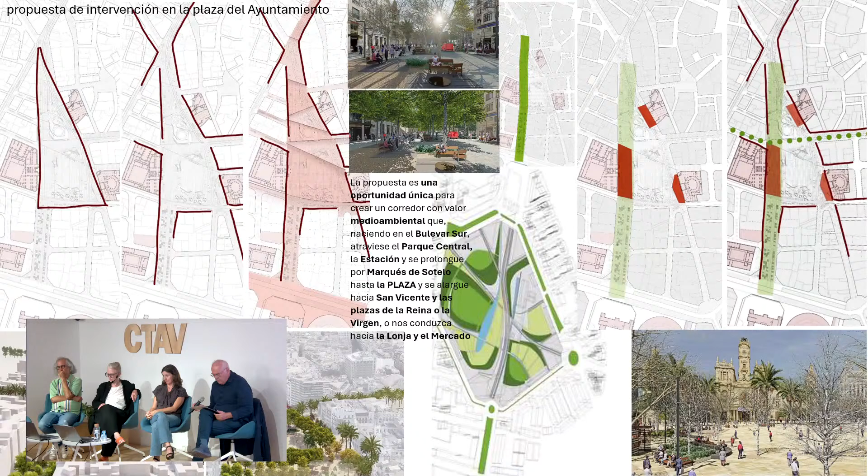¿Qué podemos hacer nosotros para vincularnos con la naturaleza? Por un lado, a través de un proyecto que tenga muy en cuenta la sostenibilidad, entendida como entrar amablemente a vincularnos con la naturaleza, considerando la reutilización de materiales existentes en la plaza, tanto en el nivel que vamos a trabajar como en los inferiores, donde hay adoquines de basalto y piedra de muy buena calidad que podríamos reutilizar en nuestro proyecto.

Y en segundo lugar, evitar la retirada a vertedero del máximo de materiales, utilizando unos molinos para triturar todo lo que podamos y usarlo como zahorras para la nueva construcción. Esto ya lo hicimos con el Ayuntamiento de Valencia en el Parque del Oeste, donde prácticamente no hubo vertedero y reutilizamos todo el material en la nueva área del parque.

Por otro lado, estaría crear una plaza urbana que ofrezca confort, durabilidad y prestancia, con un solado característico que debería tener cierta dureza porque el uso es muy fuerte en la plaza, e intentando incluir suelos drenantes donde fuera posible para humedecer el subsuelo lo más posible.

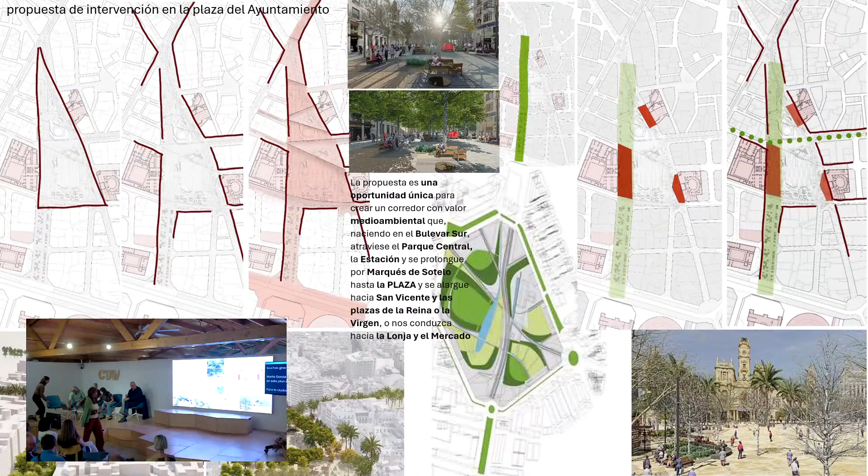Yo tengo que pasar las imágenes. ¿Cómo lo hago para pasarla con esto? Si no te importa.

Esas tres perspectivas que estamos conociendo complementan muy bien las ideas y enfoques de Kathryn Gustafson. Vamos a tener una idea muy clara de hacia dónde se está moviendo la ciudad de Valencia y cómo está posicionándose dentro de una ciudad conectada con la naturaleza y con los ciudadanos, viendo también las cuestiones controvertidas alrededor de la sociedad y la cultura de los nuevos parques.

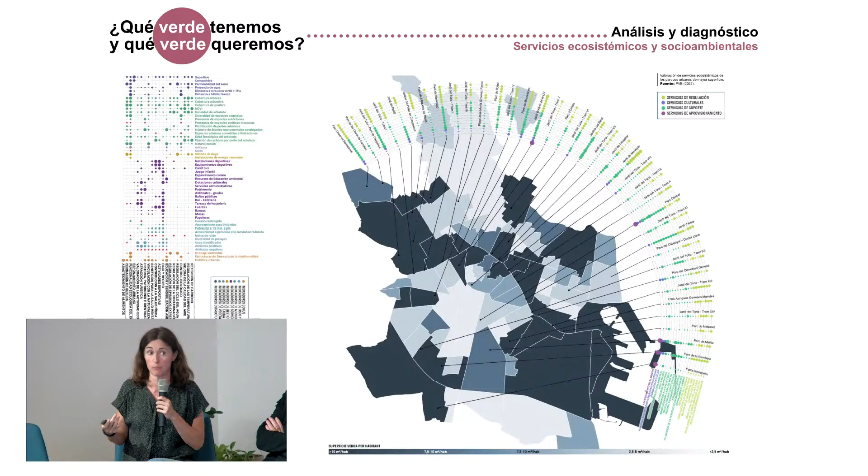Esto que veis es una matriz en la que relacionábamos esos indicadores con los servicios ecosistémicos. Tras este análisis exhaustivo conseguimos tener una lectura de qué zonas verdes de la ciudad de Valencia nos aportaban realmente una buena calidad y cuáles estaban escasas y había que mejorar.

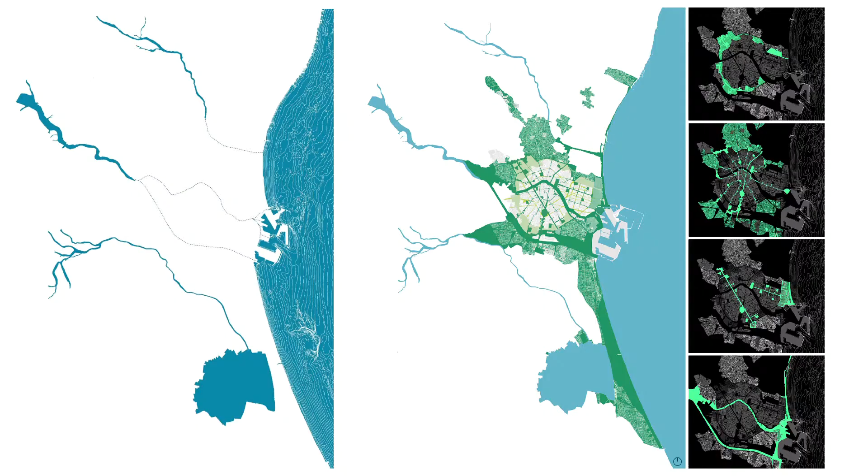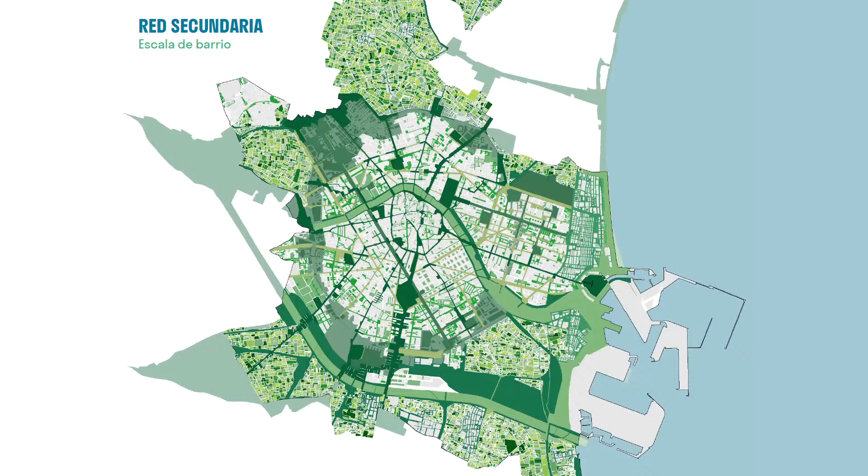Aquí veis planos que no voy a explicar en detalle, de la escala supramunicipal, que tiene que ver con los flujos del río y la huerta; la escala urbana, que son más ejes de ciudad; y la escala de barrio, que es un trabajo mucho más detallado de cada barrio.

Para conseguir este mapa futuro a un horizonte de 2050 se trazaban siete líneas estratégicas, cada una repleta de planes de acción que, de manera transversal, trataban de ir construyendo esa realidad futura de una ciudad más verde y más sostenible. Aquí veis un poco los esquemas, y voy a mostrar unas imágenes.

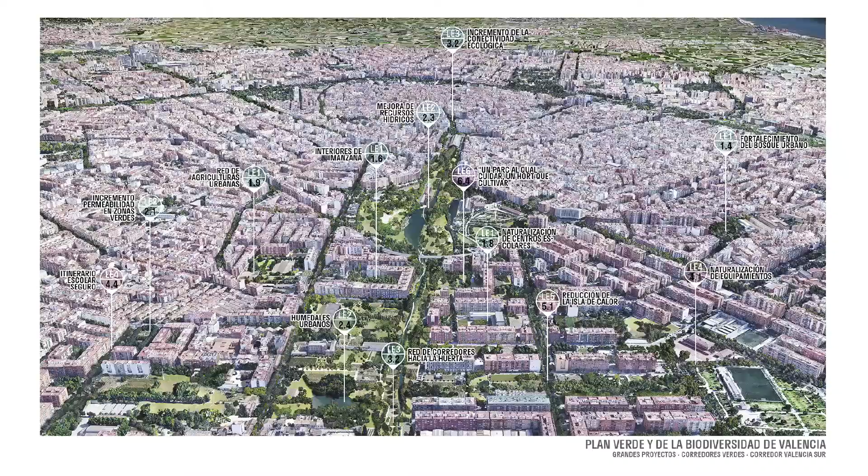Este plan se aprobó, ¿un año? No lo sé, creo que más de un año. Nosotros nos fuimos a Alicante. He de decir que este plan tuvo un plan de participación ciudadana, donde trabajó mucha gente, algunos de los que están aquí. De hecho, hay una foto, y realmente fue muy interesante.

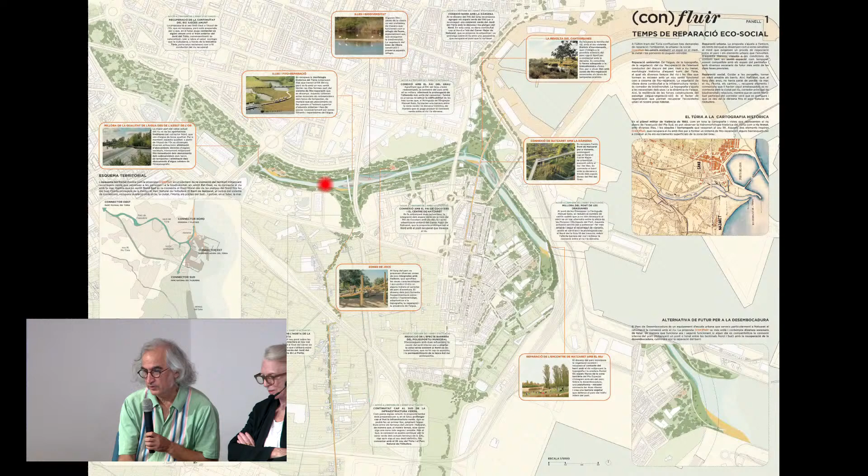Bien, a nivel urbano es importante 2 puntos que os quería comentar. Vale. Hay oportunidades. Una es que cuando se soterren las vías del tren, se quitará el escaléctric que hay aquí.

Voy a pasar a la otra imagen que es más cercana. Vale. Y se puede conectar esta bolsa de terreno que nos aparece con toda la huerta protegida de Encorts y de la Punta, que es un poquito esta conexión que os aparece aquí.

La otra, para nosotros también muy importante, es que el corredor verde que supone el río Turia, cuando llega, se puede bifurcar en dos: uno continuando el río y el otro doblando hacia el norte, para unir todo el corredor de 10 kilómetros de parque que tenemos con la dársena de la Marina de Valencia, que ya es pública, y con todas las playas del norte, ¿no?

Ahí está el PAI del Grao, está en elaboración. Es una oportunidad para hacer las cosas bien, porque en las últimas propuestas aquí hay una fila de torres que, claro, las ponen en fila para estar con vistas a la marina, pero reubicando esa edificación se permite esa conexión.

Y por último, ya puestos a soñar, habrá un día en que la ciudad de Valencia será lo suficientemente madura para que el río llegue al mar. Solo faltan 150 metros que están taponados por el puerto.

A ver, seamos serios, tenemos un corredor verde precioso de 10 kilómetros, pero está cortado al principio porque no hay conexión de todo el jardín del Turia con el parque fluvial del río Turia por el nudo de autopistas de la V30, y tampoco llega al mar porque faltan 200 metros de puerto. Entonces, soñemos y pensemos qué es lo que tenemos que hacer. No sé cuándo, algún día será posible.

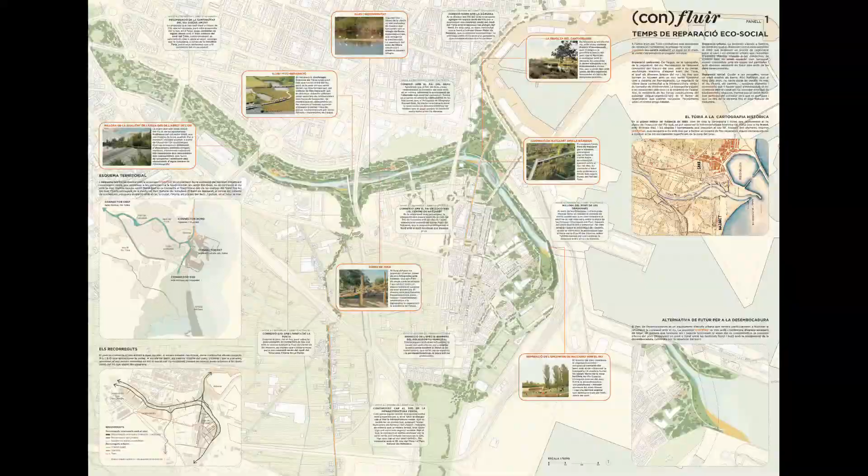Y por último, vamos a ver, es lo más que podemos ofrecerle ahora al barrio de Nazaret: unir el río con esta bolsa de terreno que ha surgido porque el puerto se ha retrasado. Y para eso este punto era muy estrecho.

De hecho, daros cuenta que el cajero, o sea el puerto, ahora aquí ha cedido 100 metros, ahora el río está encajonado desde aquí. Para eso hace falta demoler 100 metros de cajero de hormigón, que se lleva un tercio del presupuesto previsto, pero claro, es imprescindible porque si no demolemos, no unimos el jardín del Turia con el parque de Nazaret, ¿no? Hay que empezar a pensar en que es tiempo de gastarse el dinero en reparar

y arreglar los desastres que hemos hecho en los últimos años, ¿no? Vale, muchas gracias. Muchísimas gracias.

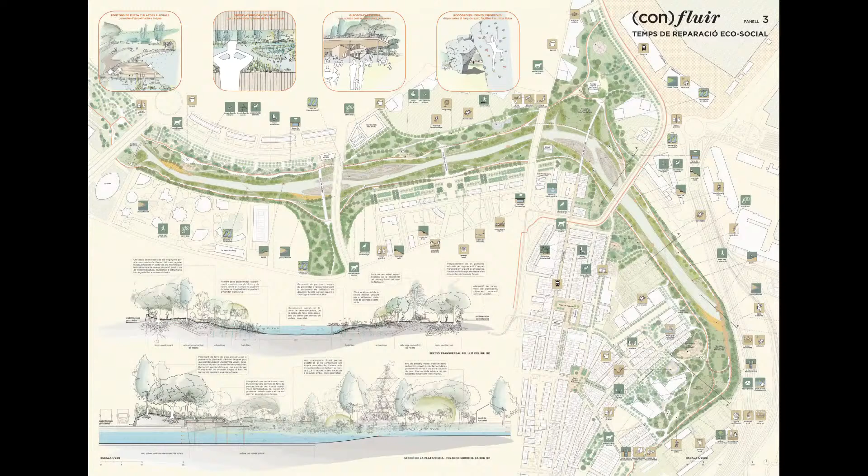Comenzamos entonces ya el debate, el intercambio de ideas y proyectos, en el que sería estupendo que en un momento determinado pudieseis participar todos. Vamos con cuatro cuestiones en realidad: el impacto social y cultural de estos nuevos paisajes urbanos, la compatibilidad con el tráfico rodado. Vamos a hablar, por supuesto, de cambio climático y vamos a hablar de futuro.

La primera cuestión para todos, pero específicamente, si os parece, con Kathryn Gustafson. I really would like to know, after hearing all these projects, what do you think about Valencia, about the future, the immediate future?